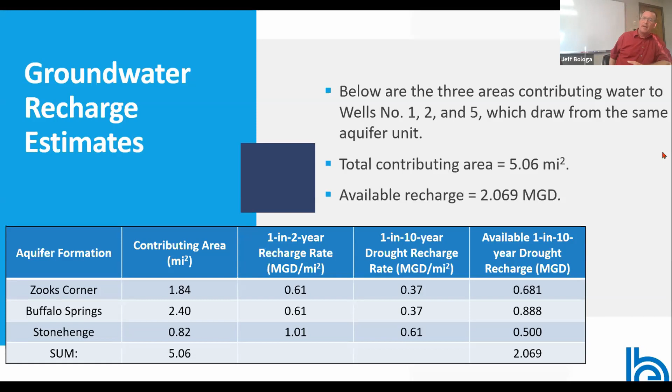and we would use that number for planning. What that does is that pretty much says that well will have a safe yield if it's designed based on those numbers in a worst case scenario, and that's why we use the 1 in 10 year drought recharge. And for this watershed that has well number 1, number 2, and number 5, the available 1 in 10 year drought recharge is about 2 million gallons per day, or 2.1 million gallons per day. You can go ahead.

So what we did, we had the drought year recharge of 2 million gallons a day. We looked at wells 1 and 2, which withdraw about 1/2 of a million gallons per day. So if we look at the available water, which is the precipitation on the area, the geologic formations, we have an available water of 1.5 million gallons per day. We wanted to add an additional 500,000 gallons per day with well 5, which took us down to 1.069 of remaining available water, or we were utilizing 48% of the 1 in 10 year drought recharge for the aquifer.

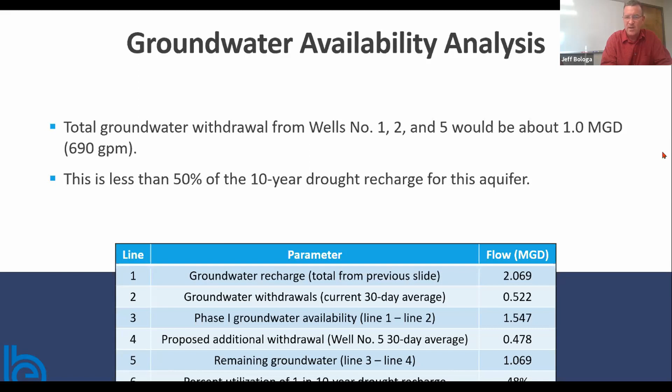With that background, we did drill well number 5. It's a 10-inch open borehole well. It has 211 feet of steel casing in the well. So it's a hole drilled in the ground. You install steel casing, so for the first 211 feet, really no water can enter the well. Then the well is an open borehole in bedrock from 211 feet to 420 feet below grade.

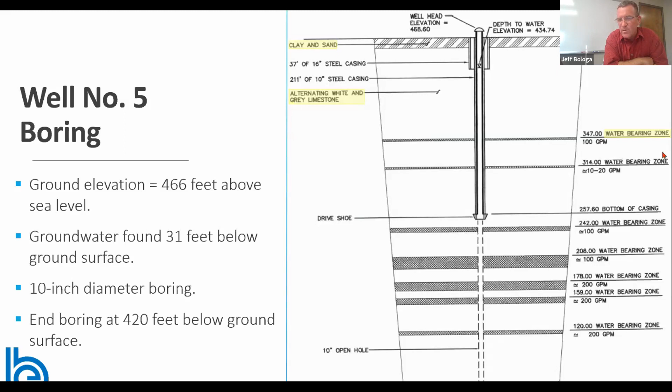So after we drilled it, we began to pursue the Susquehanna River Basin Commission to permit the well for the volume we had wished to get. Couple things about permitting. In Pennsylvania, for a public drinking water supply, there's 2 basic hurdles you have to overcome, not hurdles, but regulatory requirements. Susquehanna River Basin Commission really kind of focuses on water quantity. So they're looking at water quantity impacts, ecological impacts, impacts to other users, things like that.

So when you drill a well and you test it, the one aspect you're looking at is the water quantity and impacts to other users in the environment. River Basin regulates that. Water quality concerns are more closely regulated by the Department of Environmental Protection. And they're looking at the water quality of the well, how you're treating it, treatment systems that are put in place, the amount of redundancy you have in treatment systems and safety factors and things like that. That does overlap. The River Basin does in fact look at some water quality issues, and the DEP does in fact look at quantity issues.

Use like this, where the water is used and returned to the same watershed that it's taken from, is a non-consumptive use. Susquehanna River Basin regulates uses that are over 100,000 gallons per day, which is approximately 70 gallons per minute on a 24/7 total time frame. So the well was drilled, and when we got ready to do complete aquifer testing, we did start in June 2018 an aquifer test.

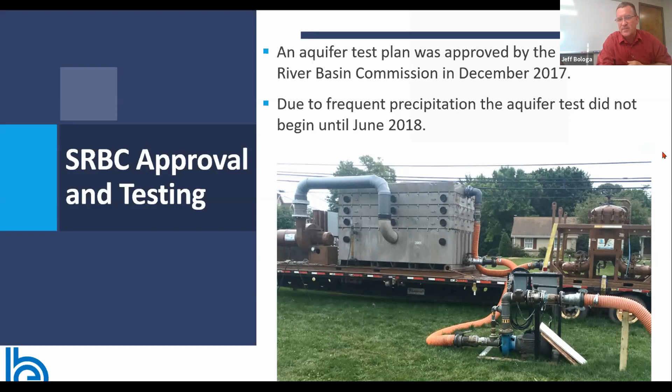Prior to starting the test, we had, of course, well number 5, the future groundwater well, and we also had about 7 or 8 monitoring wells. So those monitoring wells were wells in areas. Most of them were residential wells, farm wells, or they were other supply wells owned by other water suppliers.

So what we did was we put monitoring devices in those wells, and we surveyed all those points to mean sea level elevation, and we started collecting groundwater elevation data, both to see how the system reacted, when well 5 was not being used, to other water uses in the area and other water supply wells, and also to determine background trends of the aquifer prior to doing the test.

Prior to doing an aquifer test for the DEP or SRBC, you want to see a declining water level, declining in the wells in the aquifer. So in times of high precipitation, very wet periods of the year, you really don't want to conduct an aquifer test. So we watch all those levels in those wells, and we look for a time when it's declining.

And it's kind of tricky because you don't want heavy rains right prior to the start of the test or during the test. So not only do you have to have a declining condition, you also kind of have to be a weatherman and forecast what's going to occur in the 5 or 6 days while the test occurs. And beyond that, it's nice to not see any rain during the recovery period when the pump test is over and the well is turned off.

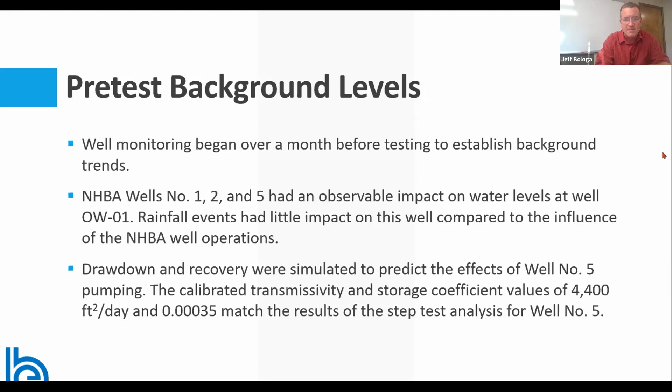So, go ahead. So to start, we had background monitoring in place. We're monitoring background conditions. We're waiting for a declining water level condition. We're waiting for a time when we're watching these wells and the water level in the wells is dropping. When all that is occurring and the weather looks favorable, we do a step test on the well. So it's a constant rate step test.

So we pump the well for three intervals: one at 400, one at 600, one at 800 gallons per minute. In this instance, we pumped it for about 2 hours per step. We pump it until we see an asymptotic curve develop. So we see the drawdown, and then we see the specific yield of the well kind of equalize, and the curve will go horizontal. When that occurs, we go to the next step.

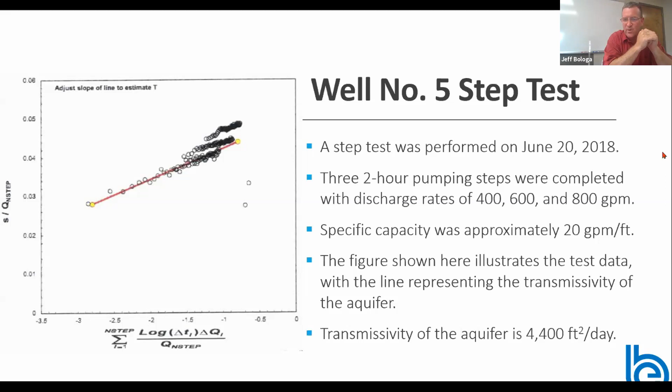From that data, we found the specific capacity of the well was about 20 gallons per minute per foot. The graph to the left shows you the 3 steps and the best fit line. And from that data, we determined the transmissivity of this aquifer was about 4,400 square feet per day. So after we have that data, that's the data we really use to pick the aquifer test rate for the pumping test. So from that data, we picked 600 gallons a minute.

So the aquifer test, per regulatory guidelines, has to be 72 hours. This aquifer test we completed for 93 hours. The reason being is that on the last day of the test, I believe, we actually had a fairly significant rainfall, which kind of threw a horseshoe into our test and calculations. So when we had that rainfall, we were monitoring surface water and well water. So we really used the surface water to determine when we came back to a base level.

So the rainfall occurred, and we had a weir in a stream, which I'll show you a little bit later. When the rainfall occurred, we could see that recharge to the stream increase. When that occurred, we kept the test running at a constant rate until the volume of water going through that stream weir rose up after the rainfall and then slowly dropped down to the same level it was prior to the rainfall. When it got back to that level, that's when we started our 72-hour clock again.

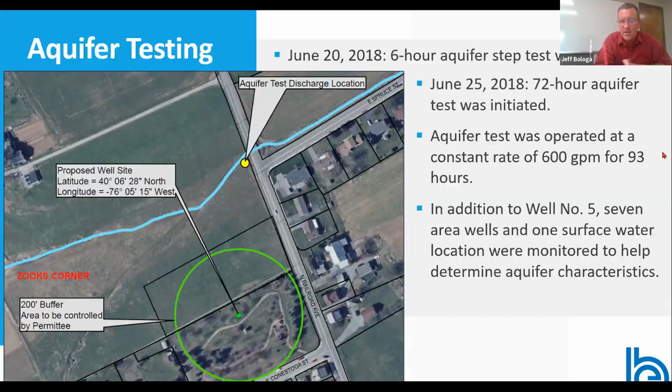We had more information on it, which is another challenge with doing this aquifer testing: some of your monitoring points are farm wells and residential wells. You don't always know a lot about them. Sometimes you can get the amount of steel casing that's in the ground. You can get the depth.

Some drillers' logs will have where they hit water at, but they're not extremely technical on how they're logged. So there is some interpretation you need to do when using some of these observation wells. But they're very worthwhile, and it's very expensive to drill a bunch of observation wells as well.

So whenever we do a supply well and a pump test, we'll look at what type of monitoring points we have available to us in the form of residential and agricultural wells, and we'll try to use those to the best of our ability. In some instances, when we don't have enough wells or enough information to look at time distance drawdown curves between points, we will in fact have to come in and drill monitoring points for aquifer test. But what we have here is well number 5, which is the test well.

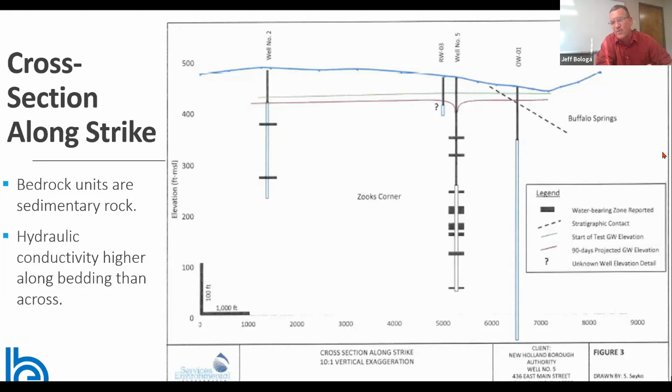All right, so this is the cross section along strike. So along strike will be along the bedding of the rock is what that means. So I talked a little bit earlier about these observation wells, and some of them are fully penetrating the aquifer that we're testing, and some of them are partially penetrating the aquifer that we're testing. So for instance, well RW03 was 292 feet from well number 5, so it's fairly close to well 5. And we only saw 5 feet of drawdown.

However, well OW01 monitoring well was 1,392 feet from well number 5, and we saw 8 feet of drawdown. Both wells were along the geologic bedding of the rock, which you would expect more drawdown at, but we had 8 feet of drawdown 1,400 feet away, and we had 5 feet of drawdown 300 feet away. The reason being was that RW03 didn't fully penetrate the aquifer that we were pumping from.

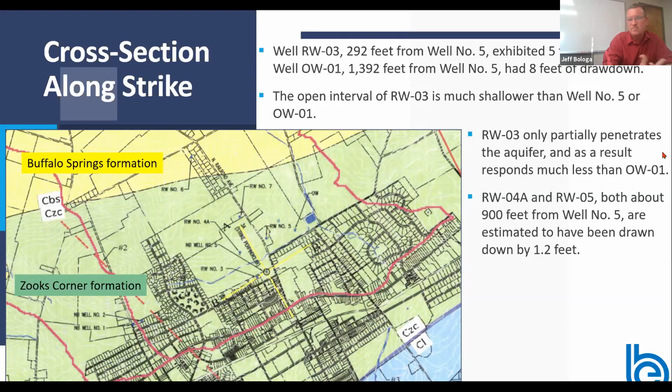So things like that are where we benefit from having a lot of monitoring points and a lot of data to try to weed through some of those gaps in the data and some of those questions. In front of you now is our drawdown graphs for RW4 and 5. Both wells are similar distance from the pumping well. Both have very similar curves, which is good data, which helps match the conceptual model.

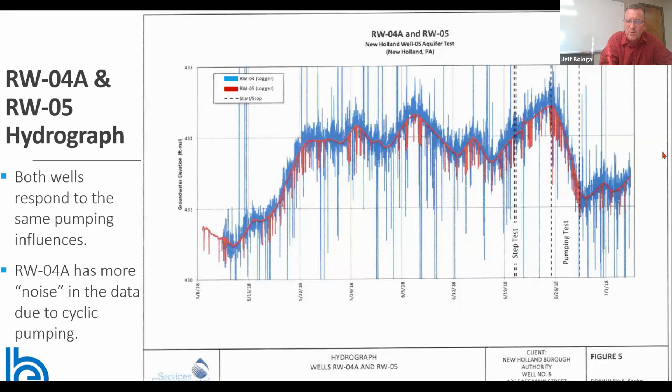You'll see that well 4 had a lot of noise, a lot of ups and downs. It's because I believe 4A was actually an agricultural well that was being used. However, with that use, we can still look at that curve and still get the general trend, which is what you see from the red and the blue bolder lines. So from the aquifer test, we develop a hydrogeologic conceptual model.

From that model, we found that the testing demonstrated that greater drawdown is exhibited along strike than across strike. So along strike is along the bedding of the rock. Across strike would be across the bedding of the rock. So it's called anisotropy, and if you're driving down the road and you see a road cut with the horizontal layers of rock, what that basically means is that the water is going to flow easier along those layers of rock than it will across them, which is exactly what we saw at this aquifer test.

And we saw that difference to be about 200%. So the water would draw down about twice as much along strike as it would across strike. So on a small scale, the influence of this strike versus cross strike flow complicates the interpretation of drawdown data. But again, the more monitoring points you have, the more you can kind of model that and see what's going on.

And then as you look at a larger area, the influence of well 5 can be viewed as a two-dimensional anisotropic aquifer. So what that is, you're basically looking at it as a larger block. You're basically looking at all the fractures and the bedding and everything together, and not just two well points and saying, well, this happens here and this happens here.

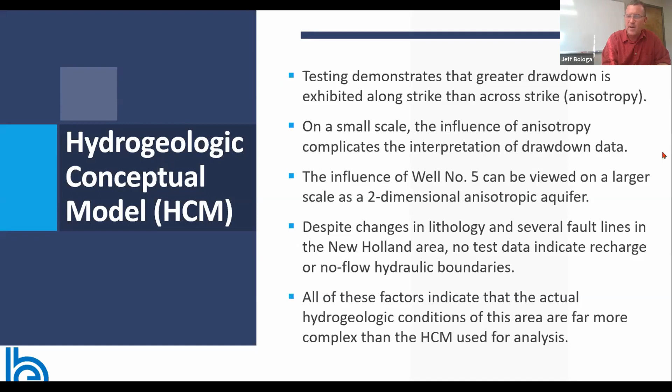So to back out a little bit, that was the groundwater portion of it. That's what we're looking at from impacts to water supplies, impacts to wetlands. As it ties into that, we also look at the surface water as well, how drawing the groundwater down below surface water is connected to surface water. So we like to see if we operate a well, if we're going to have negative impacts to maybe the headwaters, to streams, or to wetlands, and have ecological impacts.

So wherever we determine there's a stream or a wetlands or a pond flowing through our project area or through a potential area of impact, we construct a weir, like the one you see in front of you, a V-notch weir. If you see that white pipe behind it, that's a stilling well. There's a pressure transducer in there, which measures the level of the water behind that weir. That's giving you the amount of water coming through that V-notch weir, which is a corresponding volume for every increment of length above the bottom of the V-notch.

So we can get data every minute, every 30 seconds, as fast as we would like it, and we can see the change in the water through that weir. So like the wells, we started collecting background data in this weir a couple of weeks prior to the aquifer test starting. And again, we want to see the water flow decreasing through that weir at the start of the test, and we would prefer to see it decrease through the entire test, and that's why we collect background data.

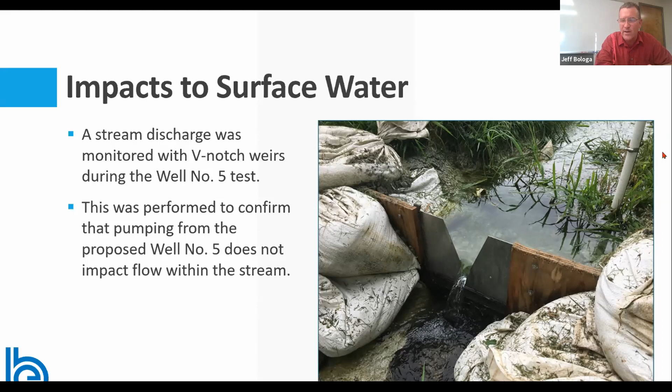So here's the data from Weir 1. You can see the precipitation events in the yellow bars at the bottom. You can see the start of the pumping test and the end of the pumping test as dashed vertical lines. You can see the step test back at the beginning. And like I'd said talking about the last slide, the Weir did fail a couple times.

But the long and short of this slide is that once we took out that failed data and continued watching it, we really saw no impacts to surface water from pumping well number 5. And we can pretty much say that definitively because, one, we had no impacts to the surface water flow through this Weir. And two, just based on well log data and well data from other wells, we did have separation from the first groundwater and surface water.

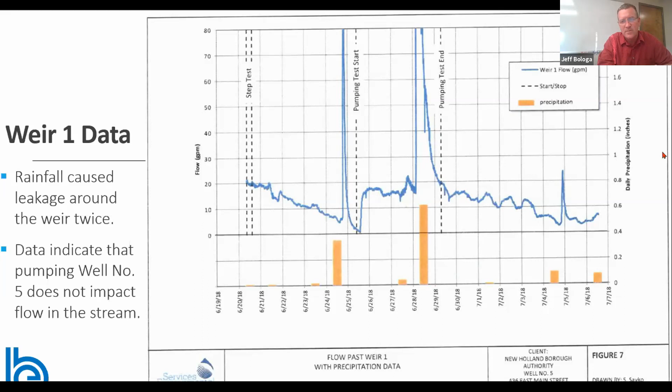Distance time drawdown data. You're looking at the time drawdown data for OW1. OW1 was the one that was, I believe, about 1,400 feet away from the pumping well. So what we do is we look at the drawdown at the end of the aquifer test. We look at how it draws down during the aquifer test, and then we project drawdown into the future for a couple of reasons. Look at potential impacts to the ecology. Look at potential impacts to other well users.

So you'll see from this well that I think projected drawdown for OW1 after 90 days of pumping will be 14 feet. So similar values were observed in wells 3 and 5. And wells number 6 and 7 did not respond to pumping well 5 at all. That's because wells 6 and 7 were across strike. They were across those layers of rock. So we really didn't see a response from pumping at that distance across layers of rock. So with this data, again, we saw a transmissivity of 4,700 feet square per day and a storage coefficient of 0.0004 for the test.

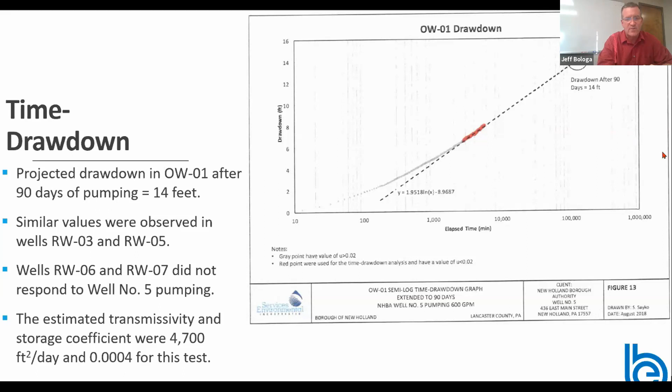So that was data collected and analyzed for what was occurring during the test. We also take the data from the second the test is shut off, and we look at how that water flows back to the wells, the recovery of the wells and of the monitoring wells. We also use that data to again predict transmissivity and storage coefficients.

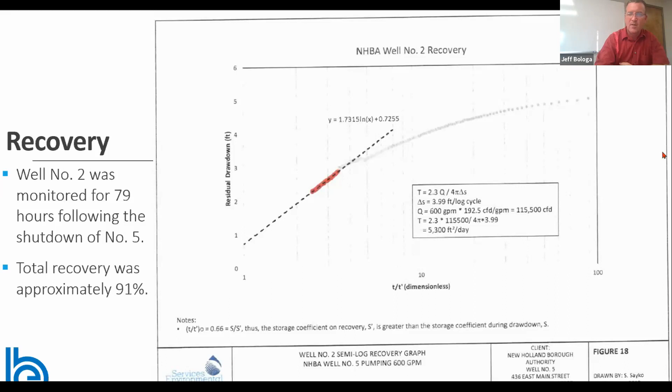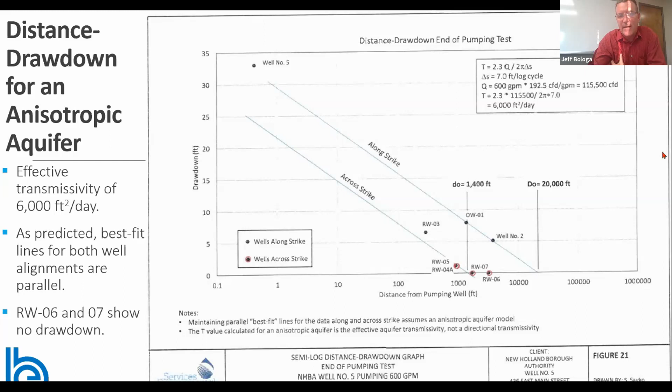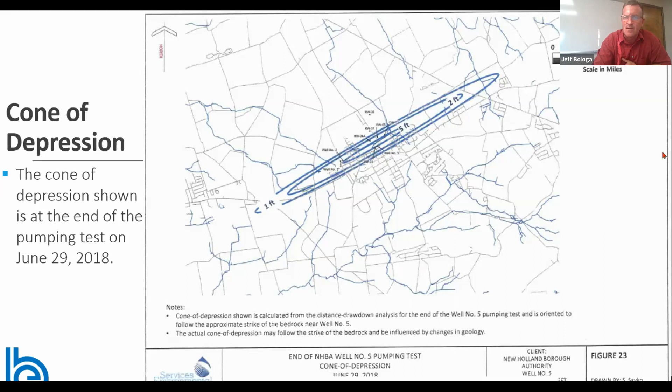So we look at the impact, and you can see just from the topo map and the streams that we are going across some of the headwaters, the streams. So these types of things are a concern from an ecological standpoint when you look at an aquifer test. And the type of things we're trying to determine from this is how far reaching is this cone of depression, and will it have impacts? And like I said, this is fairly negligible. We really saw no connection between this and surface water.

The large oval, the length of this is along the layers of the rock. So from kind of northeast to southwest, if you will, that's the strike of the bedrock. That's how the rock's layered. And then for northwest to southeast, the other direction would be across strike, along the layers of rock where it's very skinny, where 2 feet to 2 feet come close together. So it's drawing water from left to right, not so much up and down.

During this whole test, we're constantly collecting groundwater chemistry for a couple of reasons. One, see what the groundwater chemistry is for treatment concerns. Two, if chemistry changes, it may potentially mean that where we're getting the water from is changing as well, and the source of the water is starting to change. So we may be starting to draw in water from a different aquifer, a different lens in the aquifer, a surface water source. So I think every 30 minutes or every hour during the test, we collect temperature data, turbidity, conductivity, and pH.

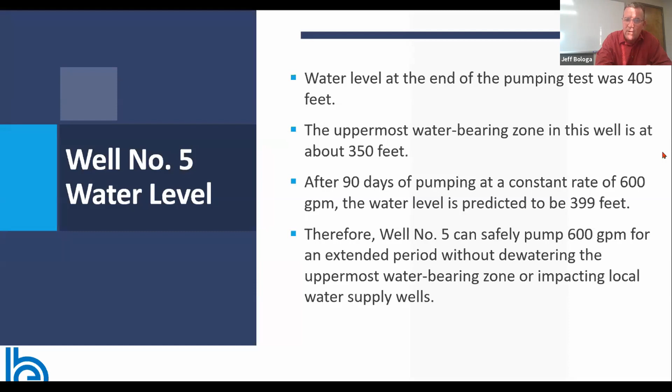So again, after 90 days of pumping, we extrapolated those curves and found out the water level in the well would be 399 feet, still close to 50 feet above the uppermost water bearing zone in the well. So that was good. So therefore, it was our determination that well number 5 could safely be pumped at 600 gallons a minute for an extended period of time without dewatering the uppermost water bearing zone and impacting other wells.

So in conclusion, we had no impacts to other surface water tributaries, not by the data we collected or by the water levels in the wells and the data we had from drilling wells and observation wells in areas. Second conclusion, well number 5 was in fact in the same aquifer as wells 1 and 2. That's what we expected. Based on the drawdown curve, all those wells plotting on the same line of drawdown during the test further confirm that.

And third, the aquifer does in fact behave as an anisotropic aquifer. In other words, water does in fact flow along those layers of rock easier than it does flow across them. And pumping the well at 600 gallons a minute will draw the well down about 34 feet at the end of the test and 39 feet after 90 days of pumping, which is, again, 50 feet higher than the uppermost water bearing zone. So not causing any real impacts to that uppermost water bearing zone and hopefully anything that may be connected to that.

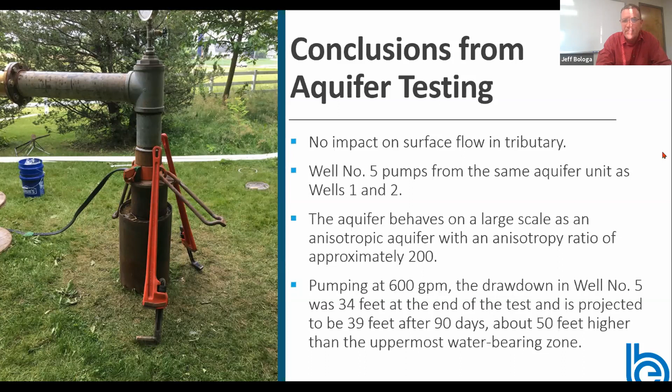So with that, the well did get reviewed. Aquifer testing got reviewed by the Susquehanna River Basin Commission and the Department of Environmental Protection in the state of Pennsylvania. They got approved at 577 gallons per minute, not 600 gallons per minute, just at that volume and at the intervals we were taking water level measurements. That became the average pumping rate that we determined it was pumped at. It's hard to tell at that volume. We have calibrated instruments to figure out these volumes, but just depending on the interval you take the rates, that's what we came up with, which was a good rate. No problem with that, but it came out to 577 rather than 600.

Combined withdrawal limit for wells 1, 2, and 5 is 1 million gallons a day. That's the combined. Each well is permitted to pump more than that. So if one well would break, it gives us flexibility to operate the other wells at a higher volume to supply the system while we repair a well. Or if one well becomes contaminated, it gives us the flexibility to use those other wells at a higher rate. And 1, 2, and 5 are in the same general watershed, although in separate sub-watersheds. The other 2 wells are in more discrete watersheds, separate from 1, 2, and 5.

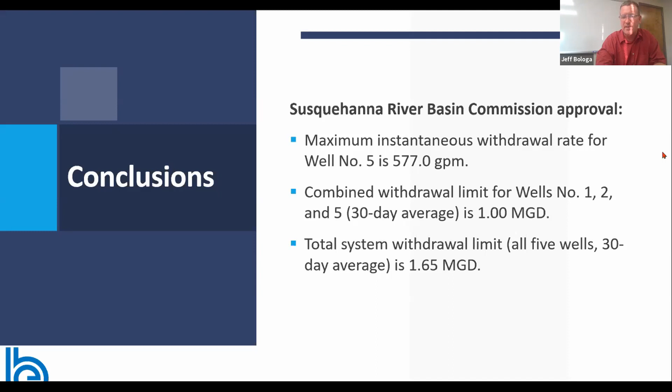Really can't say that it limits contamination entirely, but it's what's called for. It's there, we have it, and it's a great place to put a well. That's why it's there. So that's it.

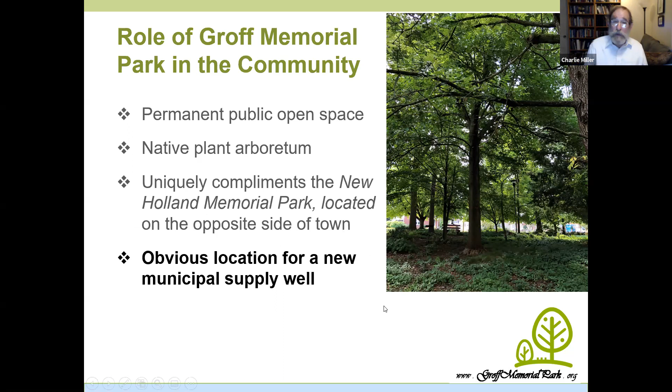In addition to providing a permanent open space and an opportunity to observe native plants, the park is also a great complement to the New Holland Memorial Park, which is on the opposite side of town, where the band shell, the tennis courts, the pool, and active recreational facilities are housed. This particular area, because of its mission, was an obvious location for a well.

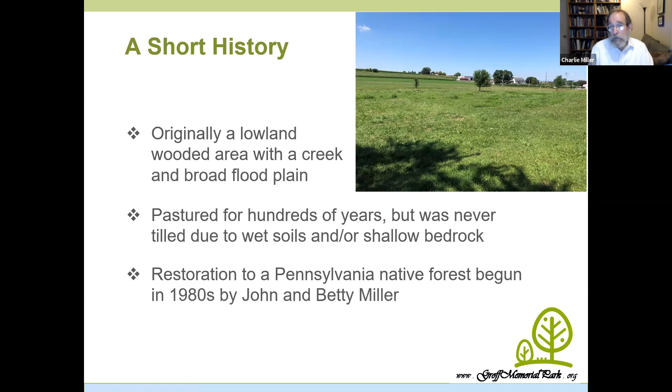The location of the park and the well was originally a wooded area, lowland with a creek and a broad floodplain. But for a couple hundred years, this area has been used, we believe, primarily for pasturing and meadow. The soil is wet and the bedrock is shallow, and there's little evidence that the area has been cultivated actively. Beginning in the 1980s, John and Betty Miller set about to restore this area to being a native forested wetland. That process involved first a donation of 2.6 acres to the borough for the purpose of creating a public park. And then the park design and its construction was funded by the Millers.

The Groff Memorial Park Trust was created to fund the ongoing operations through an endowment to safeguard the mission of the park and to administer and oversee the budget and maintenance for the park. The park was dedicated in 1990 in memory of A.B. Charles Groff and Edna P. Groff, the parents of Betty Miller. And here you can see the picture at the dedication, John and Betty Miller with their grandchildren, and Charlie and Edna Groff.

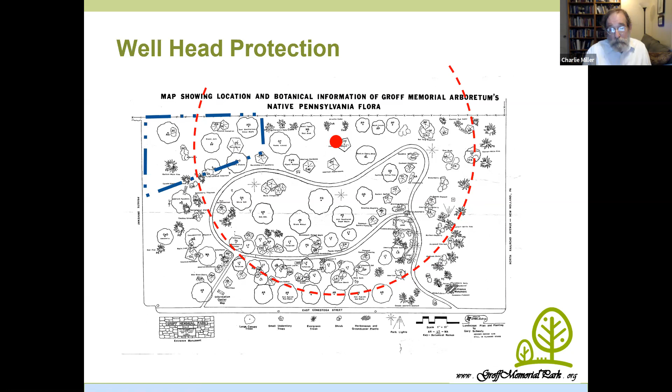And you can see from this that the park in and of itself is not sufficient to satisfy the 200-foot well protection boundary. And so for this reason, the borough annexed an adjacent piece of land in order to complete that wellhead protection zone. So this is a new piece of public land immediately adjacent to Groff Memorial Park. This annex will increase the wellhead protection area by about 2 acres, or 75%.

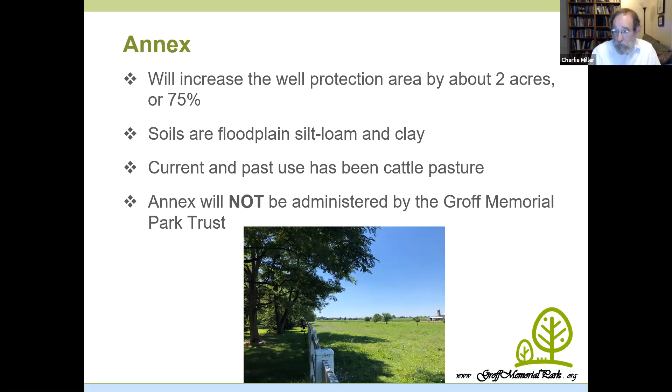The soils there are floodplain soils, and the area has been in probably pasture for hundreds of years. This particular piece of property is not part of Groff Memorial Park and is not administered by the Groff Memorial Park Trust. So this leaves open the question of what will happen to this property as we go forward.

So the obvious options in this case would be to extend the native plant arboretum that is Groff Memorial Park and incorporate lowland trees appropriate for the floodplain and facultative meadow pollinator plants also appropriate for that part of the landscape. Alternatively, the area might be landscaped in non-native plants, and of course it would have to be managed organically because of the requirements of the SRBC.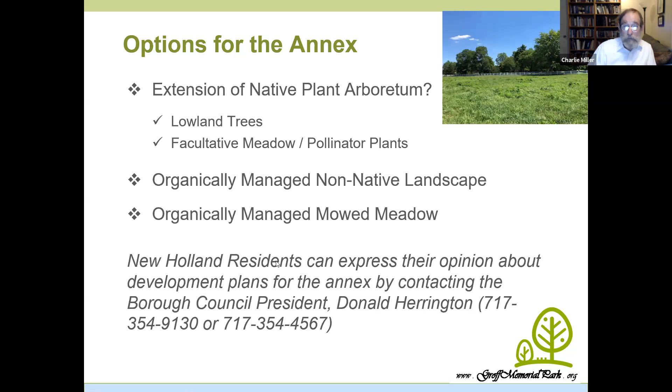And finally, it could simply be mowed. It can no longer be pastured because cattle can no longer be run on this property, but it could be mowed. And of course, maintained organically as well. So residents of New Holland that have an opinion about public land in the borough, and particularly this piece of property, I would encourage them to contact the Borough Council, and here on the slide is contact information for the Borough Council President.

Just going to briefly show you around the website, which is where a lot of the educational function of the park is provided. So if you go to the website, some of the things you'll find right away is a list of all the plants. And if you click on any one of the trees, you can get information on that tree.

Charlie, sorry to interrupt, but we're not able to see the screen with the website on it. Oh, that's terrible.

Well, then I encourage everyone to go to the website. And on that site, you will be able to access information on every tree. And there's also a virtual tour there, which allows you to do a digital tour of the whole park and get views of the park without actually having visited there, and information on the areas. And of course, an opportunity as well to join and participate as a volunteer.

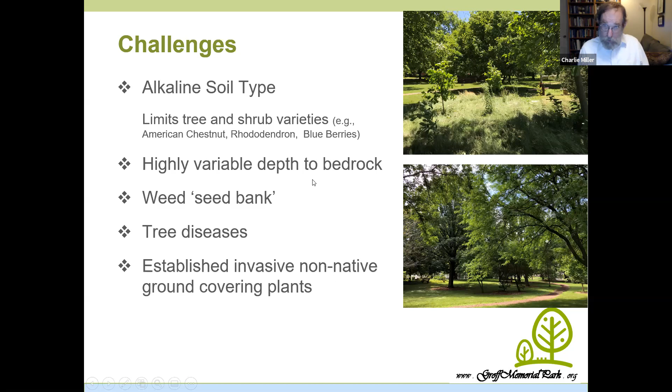So the park continues to grow and to evolve, and as it does so, it confronts continuing challenges which make it interesting. One is the soils are alkaline based upon the karst carbonate bedrock that Jeff was just discussing. The depth of bedrock is very variable, making placement of trees and consideration of habitat more complex. And there's a continual battle against seeds that are still viable after 30 years in this old pasture, and seeds which are being blown in all the time.

The park would not be able to be what it is today without hours and hours and energies provided by many people, including Terry's Lawn Service, which does the mowing and general maintenance, Earthbound Artisans, which is an organic landscape company, Jacob's Tree Service, which does a thorough assessment of our trees every year and does major pruning and occasional new plant installations. Friends of Groff Park are those folks that come to join us, usually through the website, and I'd like to call special attention to Cheryl Schultz, who has been the mainstay of the program for 4 years.

And finally, Morris Arboretum of the University of Pennsylvania, which donated their professional services to do a detailed evaluation of the park, the collection, and assess its management plan, and also provided recommendations for new plantings in the park as well as in the adjacent annex area. And that's all I have.